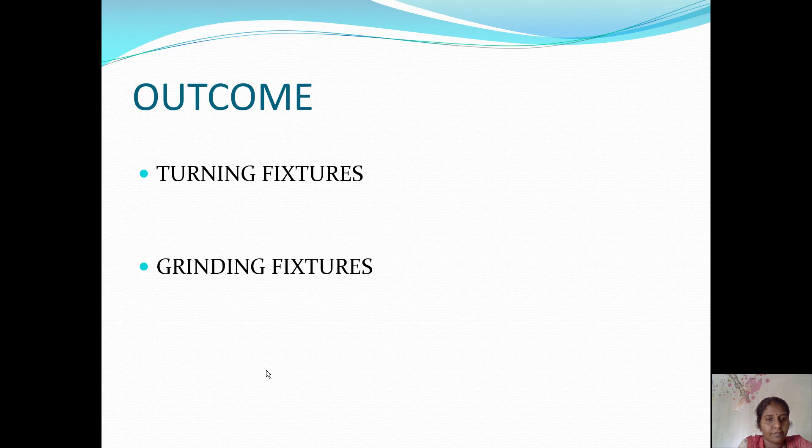In this session, students will be able to understand the different types of turning fixtures used in industry and what grinding fixtures there are. First, we will discuss the turning fixture: chuck jaws, collets, special jaws and expanding pegs. We are already using 3 jaw, 4 jaw and collet chucks for holding the workpiece.

Standard jaws like 3 jaw and 4 jaw chucks are widely used to hold work corresponding to a variety of operations. In turning fixtures, first we are going to see chuck jaws, collets, special jaws, then expanding pegs. In industry, normally for holding the workpiece for turning operations, we have 3 jaw and 4 jaw chucks, collets are also there, and faceplates are used for irregular workpieces.

Standard chuck jaws like the 3 jaw and 4 jaw chucks are widely used to hold the work corresponding to a variety of applications. In the case of bar work, spring operated collets are used. However, chucks and collets, while fulfilling the majority of applications, may not be suitable for specific applications.

As we are using jaws and collets, they will not be suitable for specific applications, so we have to go for special jaws and expanding pegs. To overcome these limitations, we go for special jaws or expanding pegs. This picture shows the special jaws used for turning operations.

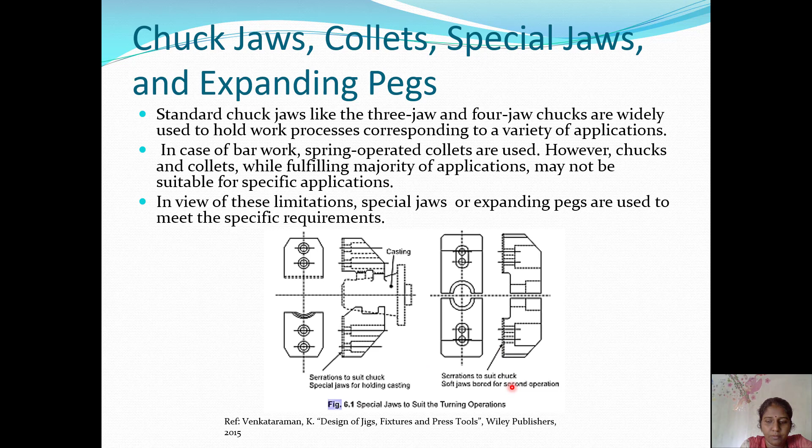Next one is expanding pegs. Expanding pegs have a wedge shape which is pulled by a drawbar actuated mechanically or pneumatically. The drawbar is here, actuated by mechanical or pneumatic control. This in turn results in the 3 segments diametrically clamping the internal diameter of the component. Here we have 3 segments which clamp the internal diameter of the workpiece.

But in the case of a wide variety of jobs requiring mass production, specially designed turning fixtures are needed. So here we have segments, and here the drawbar. In continuation with that, sliding cones are there. This is the body. Here we have a fixed cone. Clips hold this body with the segment. We have pins. So this is the expanding peg. If we are going for mass production, we have to design special fixtures.

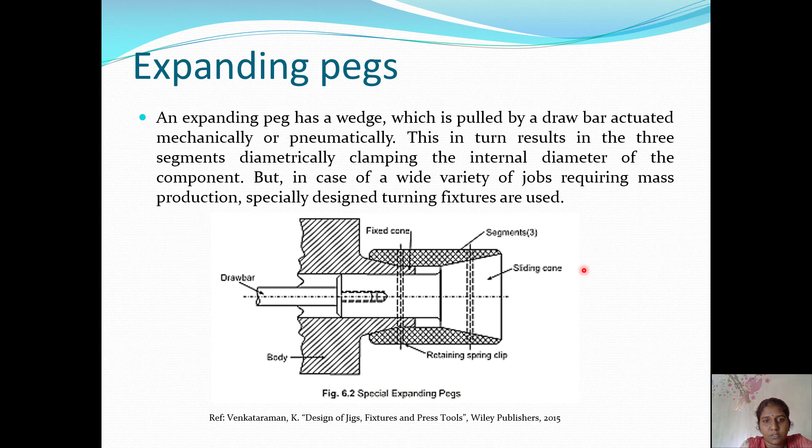Next is special features of turning fixtures. In addition to general design features of fixtures, turning fixtures require the following points. The fixture along with the component should be perfectly balanced to avoid undesirable oscillation. The fixture should be free of any projections so that interference with the tool post or cutting tool is avoided. So the fixture should be free from projections.

In view of this specific criterion, sliding V clamps and wedge type edge clamps are used so that they do not protrude outside. So to avoid projections, which would disturb the machining operations, we can go for sliding V clamps and wedge type edge clamps.

So that we have to take care of. The fixture should be free from any projection. However, in certain cases where the component itself has a large length, a heel type clamp can be adopted. So to avoid unwanted projection, we can go for a V clamp, sliding V clamp, wedge type edge clamp, and sometimes heel type clamps.

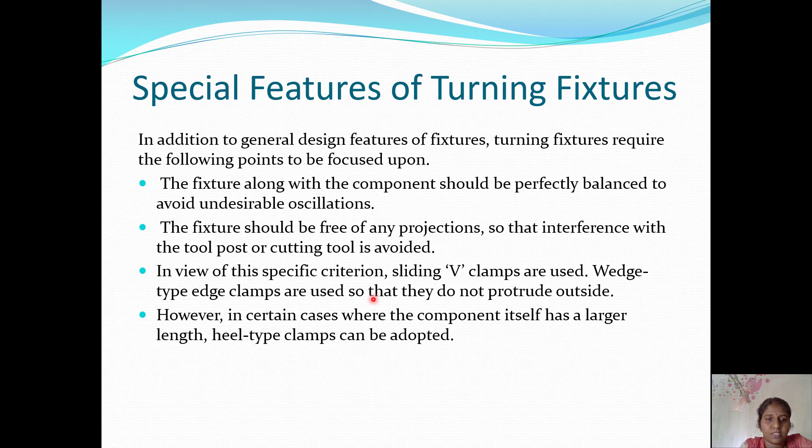Whenever fixtures are used in more than one machine, a back plate has to be used. The back plate is placed in between the headstock and the fixture. This is the back plate. We have the headstock and this is the fixture body, and they are either fastened to the flange of the spindle or screwed to the spindle directly as shown in the figure. So it is directly screwed to the spindle. Okay, so this is the front view, this is the side view. The fixture is mounted on the back plate, which is screwed to the spindle of the headstock.

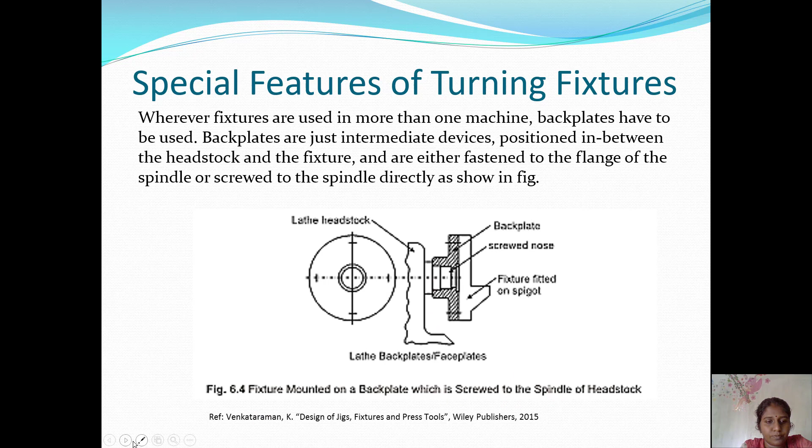This figure shows the turning fixture for boring a bearing housing. This is the bearing housing. It has a sliding V clamp. Here the V clamp is there. So this we are going to machine. This component is fixed here. Here the V block is there. A balancing weight is also shown in the figure. In the side view we have the balancing weight. Okay, the component to be faced is fixed here. A counter balancing weight is there. Such fixtures may be mounted on a back plate or face plate.

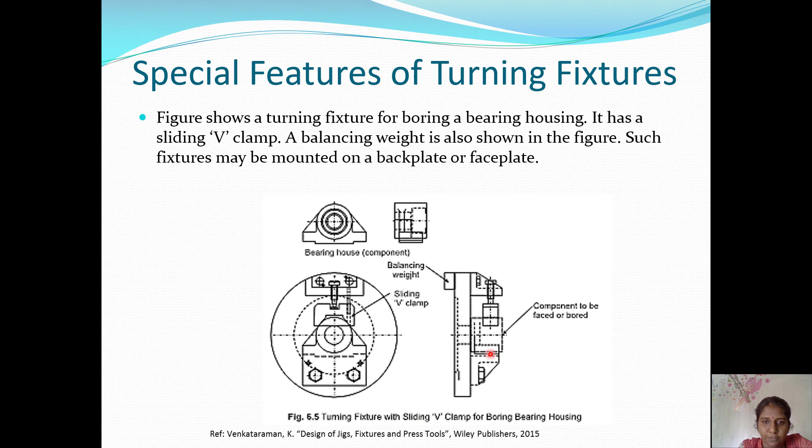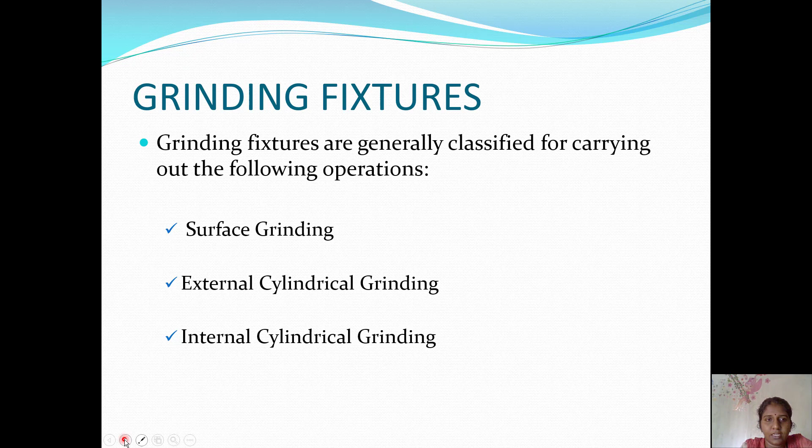Next one is the grinding fixture. Grinding fixtures are generally classified for carrying out the following operations: surface grinding, external cylindrical grinding, internal cylindrical grinding. In surface grinding, the reciprocating motion of the grinder removes the material from the top of all the components placed in the fixture. So the workpiece is fixed on the fixture. Then we have the reciprocating motion of the grinder to remove a small amount of material. The fixture in this case is a simple device with a sliding jaw clamping the components on the other side of the fixture, which are rigid and fixed. So we have jaws and clamps to mount the workpiece properly. The clamping could be effected either by screw movement, cam, or pneumatic pressure.

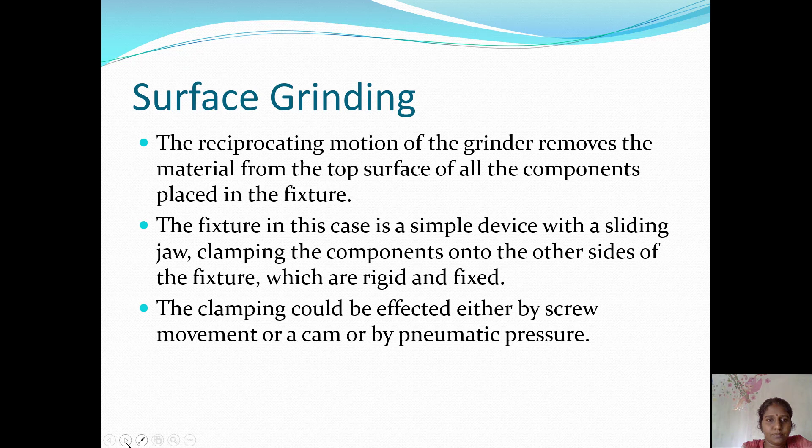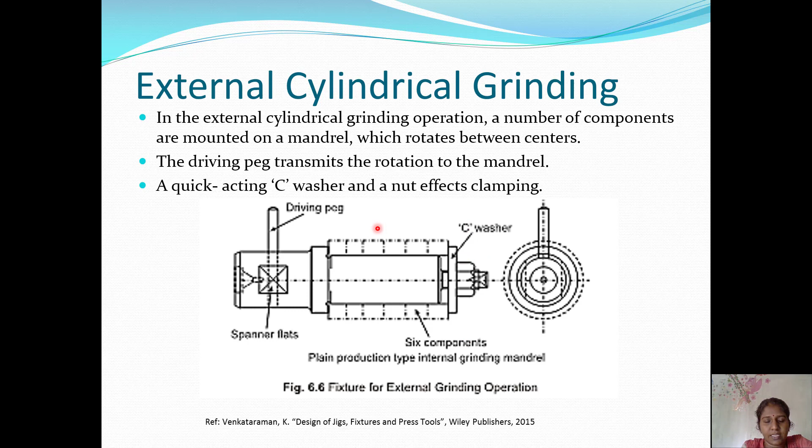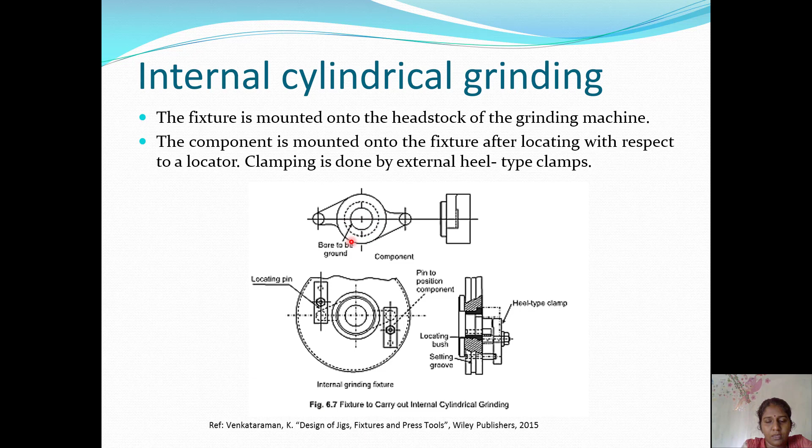Then this is the reference book. From that I collected the material. So from this we are able to know the different types of turning fixtures and grinding fixtures.